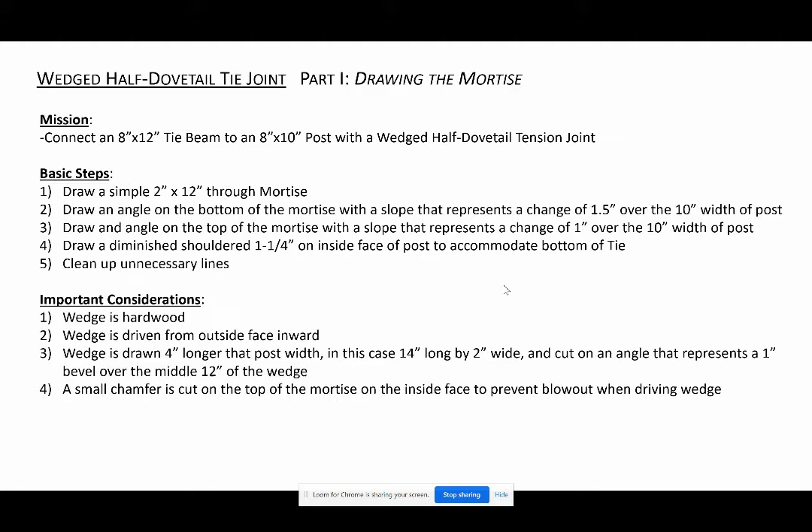And then another consideration is we cut a small chamfer on the top of the mortise on the inside face of the post. And that helps prevent blowout of the wood fibers as you're driving the wedge. So I have some images to show you.

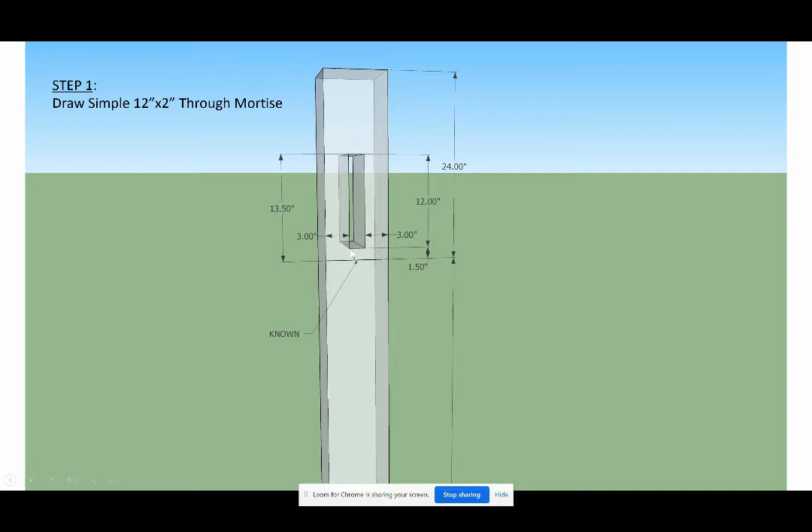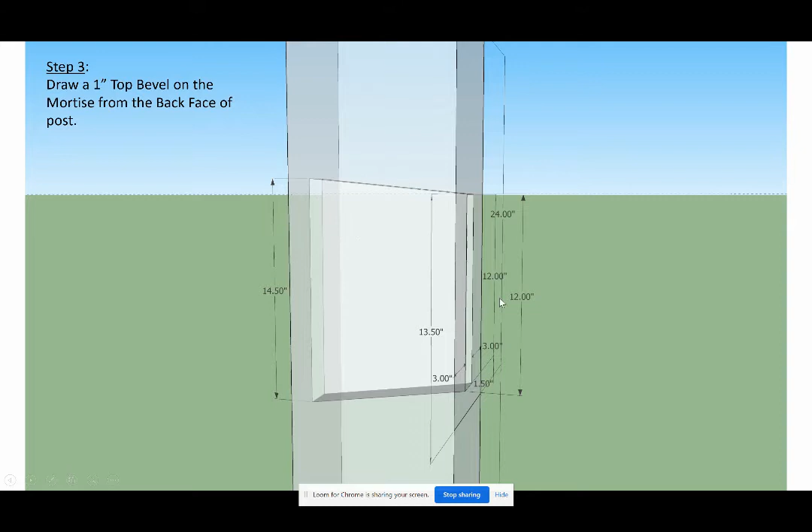So this is the next step that we do, and it's important that you follow this sequence. Once we've drawn the mortise itself, then we're going to create this 1 1/4 inch angled reduction. This is sometimes referred to as a diminished haunch.

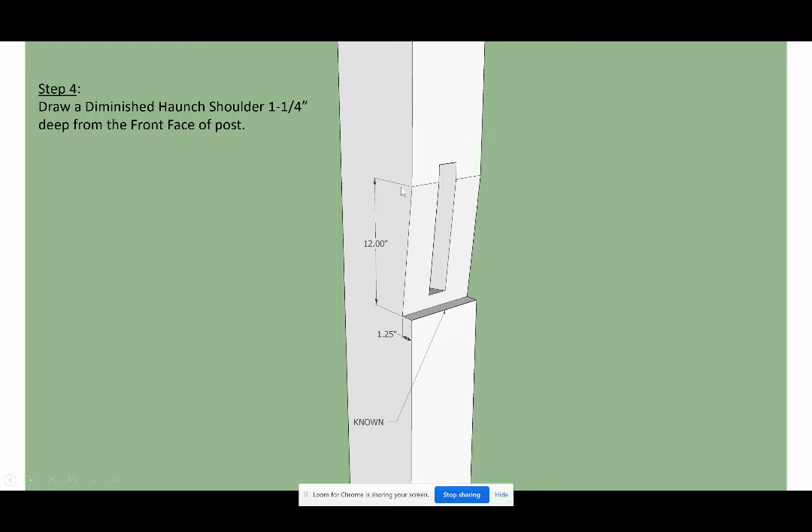You want to have bearing surface on the bottom of this. So that'll be the fourth step that we do. Some folks draw this as a full, straight recess, but we prefer to angle them. So this is the finished product in a frame we recently did.

You'll see that the tie beam is an 8 by 12. The post is an 8 by 10. Bottom of the tie shoulders in 1 1/4 inch. The wedge is driven from the outside face inward, and you'll notice that the tenon is actually cut a little bit short of the outside surface of the post.

So we draw the model full scale, but then when we cut this joint, we actually cut this about 1/4 inch to 3/8 shy of the line, because as this dries, this post will shrink inward more than the tie beam tenon will shrink. So if you cut them at the same level, then eventually as it dries, you're going to have some bulging in your siding. So that's just a little tip as you're cutting that joint.

Here's an unassembled version of this. So you can see the bottom of the dovetail. This bottom part goes in here, and then the wedge would come in from the backside at the top. And this is important that you see these dashed lines. So dashed lines are lines that are not cut. They're just there to help you visualize the joint.

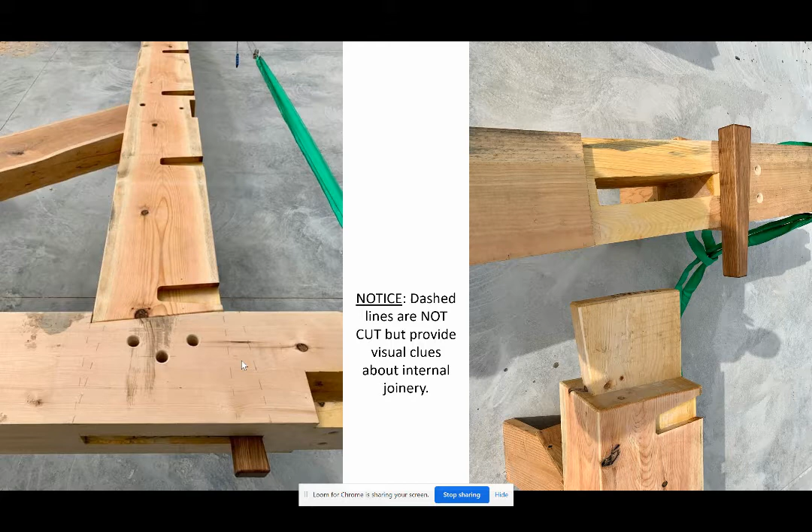And that's really helpful when you're trying to make sure that you're cutting where you're supposed to be cutting. So we would erase those. After the joint was assembled, we'd sand those off and stain the timber.

This represents the little bevel cut that we do on the inside of the post. We just take maybe 1/4 inch or 3/8 inch of material out with a chisel, not a specific angle, but just a little bit of an angle, so that when you drive that wedge, you don't have this face of the timber blowing out.

This is the model that we want to end up with. So we have the post, which is an 8 by 10. We have the tie beam, that is an 8 by 12. And then we have a hardwood wedge coming in from the backside. So before the wedge goes in, this tie beam slides in and drops down into place, and that provides the room that accommodates the wedge.

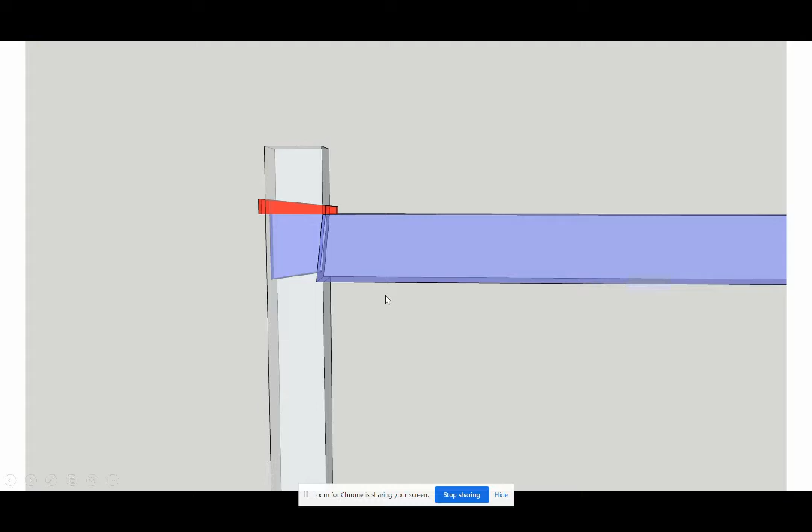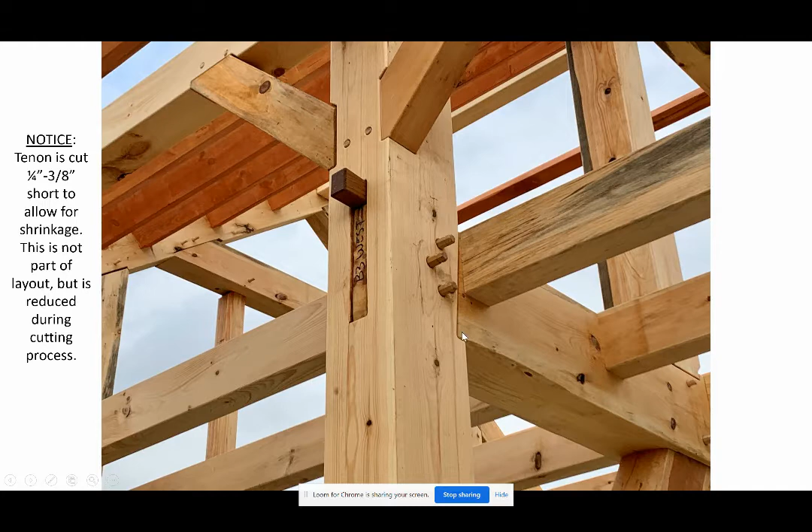One of the things I would like to point out is this is not drawn specifically for square rule layout. We used planed timbers on this, so you can see in this we have the full length of the timber. We didn't house this, we didn't do a 1 inch reduction here, which if you were using unplaned timbers, you'd need to do that. But that's as simple as just before you draw any other joinery, you take into account that inch reduction or 1/2 inch, whatever you choose to do.

So this is the X-ray view of what the post will end up with. You have the mortise that's beveled on the bottom and beveled on the top. From the inside face outward, the bevels go down and up. So it's wider at the back than it is in the front.

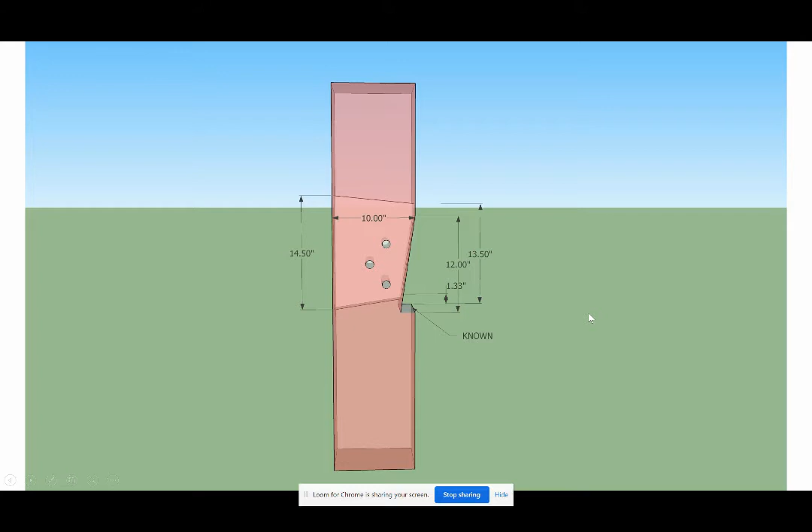You may wonder what this 1.33 inches represents. We lay this out so that this comes out along this plane at 1.5 inches up. But once you remove this material, because this is angled, that reduction ends up being about 1.33 inches from where that actually comes out after you've removed this material from this little shelf here. Don't get yourself too concerned about that. It's not something you actually need to measure. It happens when you cut the joint.

This representation shows where we would have pegged it. This joint in a lot of frames does not even require pegging, because the wedge holds it in place. And if the joint is cut correctly and with precision, the wedge is going to cause the tenon to bear on the bottom of the mortise along the bottom edge of the dovetail. And that's secure enough to hold that together.

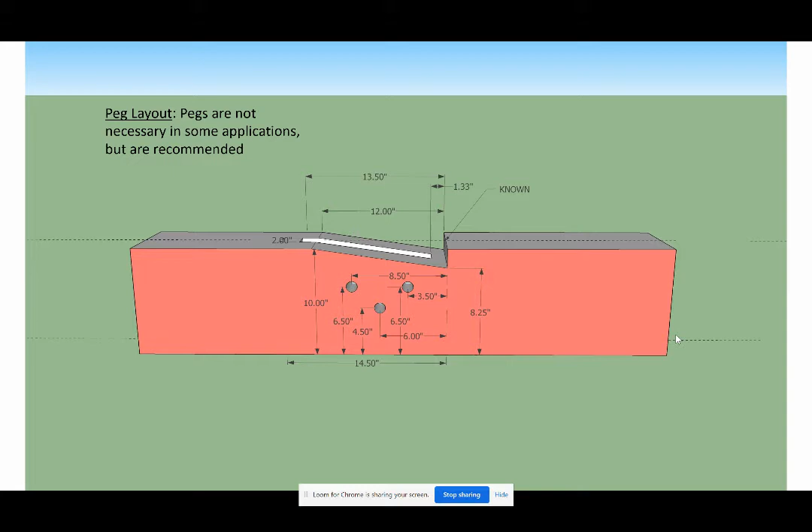Although we often will put pegs in place as well. It's sort of the belt and suspenders approach, right? You're just adding more structural redundancy to it. And this is our ideal peg layout based on the dimensions of this particular model. So let's go to SketchUp and see how we draw this.

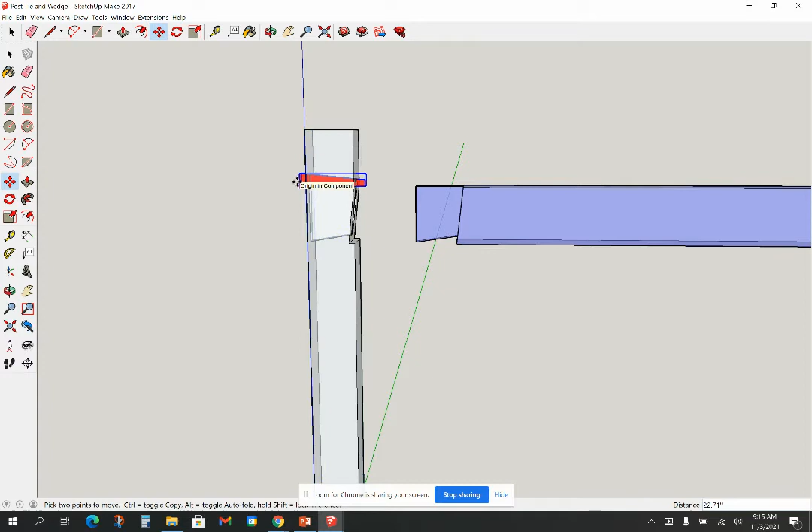So first of all, this is the actual model in SketchUp as a finalized model. So we could pull this out, and we could pull the wedge out if we chose to. So that's the exploded view. So now let's go to a new SketchUp page and see how we're going to draw this. So I'm going to start off by drawing a post that is an 8 by 10 post.

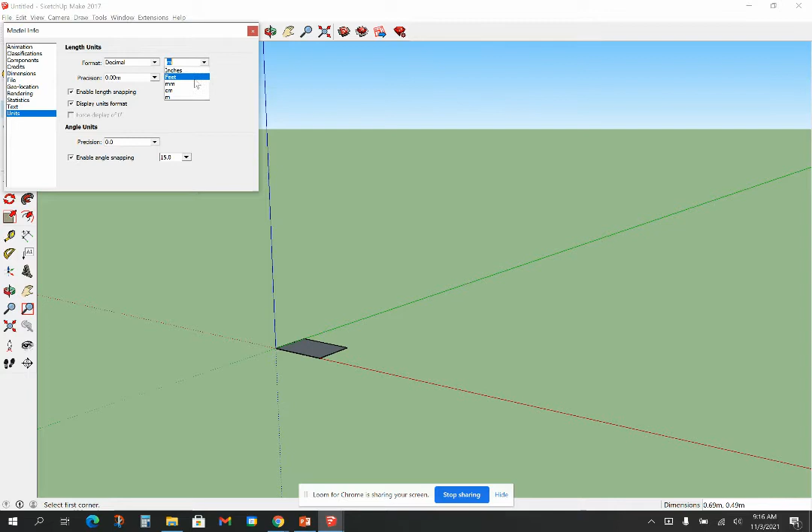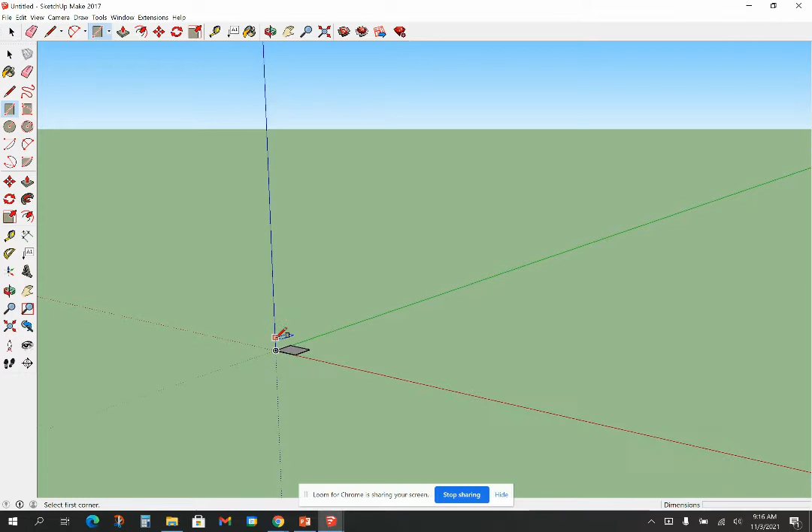So I'm going to come here, pull out a rectangle. Oops, let me back up for just a second. I got to change my dimensions here. It's in meters and I want it in inches. So let's get rid of that. Okay, so we're going to pull this out as a rectangle. So I want it to be 10 inches by 8 inches. And I'm just going to make this post 10 feet tall. So I'm going to take my push-pull tool, make it 10 feet.

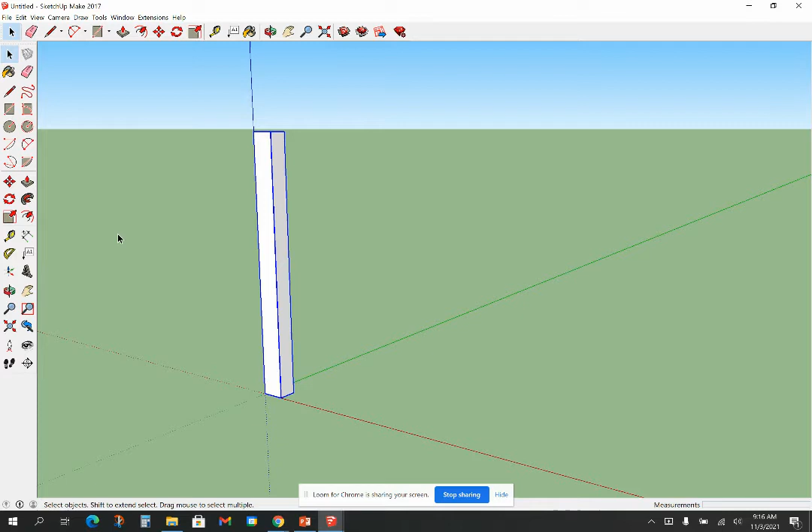And then I'm going to save this as a component. Very important. So I triple click it, then right click, make component. Post. And then in order to modify this, in order to draw that mortise, I need to open that model to make any changes. So I'm going to triple click it.

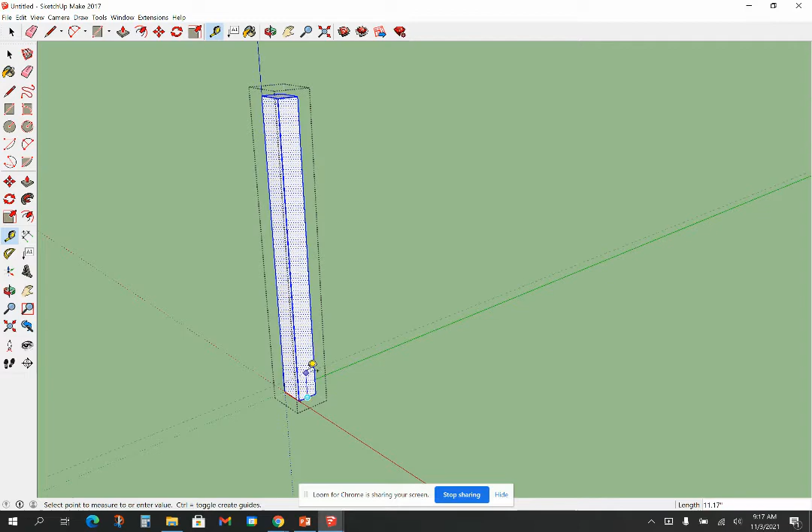My next step is I need to make a guideline that represents the bottom of this joint. And I'm going to choose it to be 8 feet up from the bottom. So I click there and I drag up and I go 8 feet, enter. This is going to become what I refer to as the known. So it's sort of like the basis for where you're pulling all your measurements from. This is going to represent the line where the bottom of the tenon sets on that diminished shoulder.

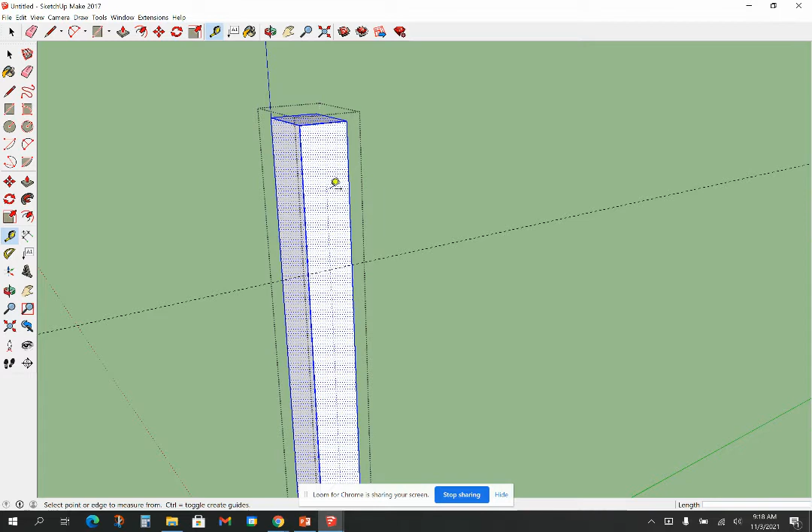And we call that the known because all learning starts at knowns and proceeds to the unknowns. One of our philosophies here at Big Beams Timber Frames. So I've located that. Now I'm going to pull some more guidelines. And you'll notice if I come out here, I can't really grab that guideline because I've opened this component. So I'm going to just kind of come in here. And now I can grab it, click on it, and then start dragging upward.

And I'm going to make another guideline 1.5 inches up. Then I'm going to make another guideline 12 inches up. And a third guideline, I'm going to make 13.5 inches up. Next thing I'm going to do is, because I want this mortise centered on this post, this is an 8-inch post. It's going to be a 2-inch mortise, and I want it centered. So that means there's 6 inches remaining of my timber. So I need to go 3 inches in from either side.

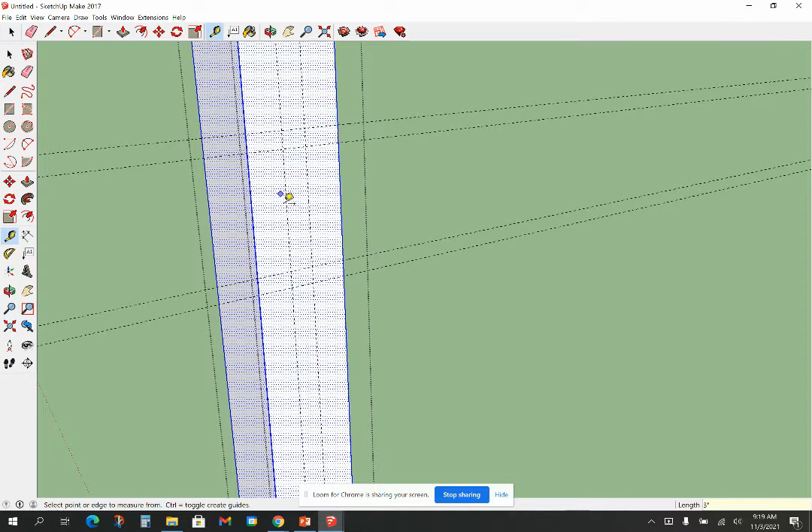So 3 inches there. And then I'm going to come over here, grab that, and go 3 inches. Notice how the green line is there. That tells me I'm pulling it along that face. Another thing you could do is you could kind of just overlap one of these, and that kind of locks it in on the same plane. So I'm going to type 3 inches again. And now what I've done is I've created some guidelines that are going to allow me to make my initial mortise. So the initial mortise is going to be just a straight through mortise that's going to go from this 1.5 inch line up to the 13.5 inch line.

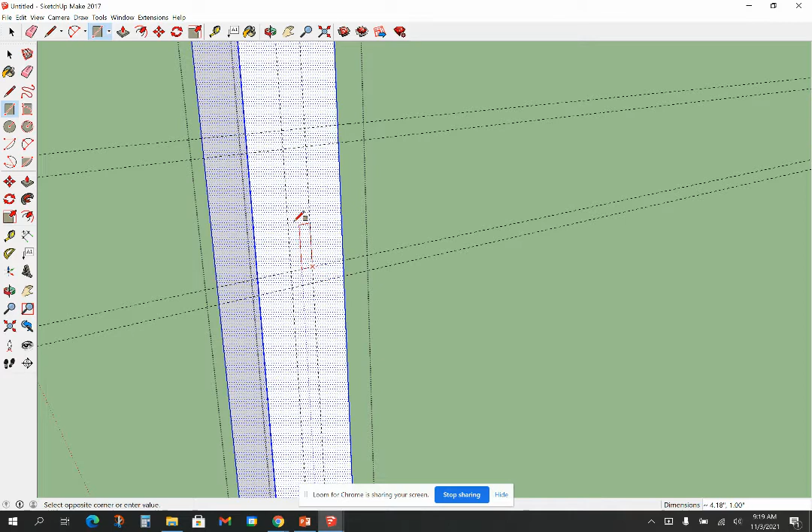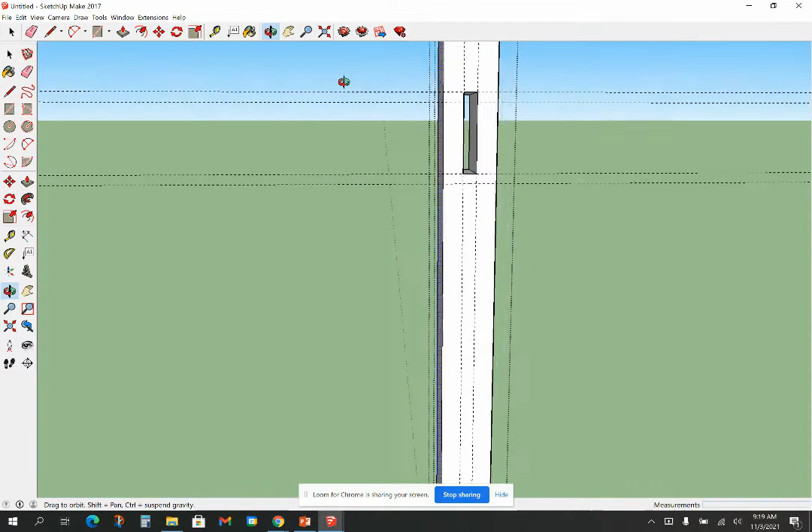So I'm going to come over and grab my rectangle tool and start here, click and drag up to here and let up. And then with my push-pull tool, I'm going to push that inward. And once it starts going in, I'm going to type 10 inches. And then that gives me a through mortise. And you can see it as I rotate it. And it doesn't extend out the backside. It's just a simple through mortise. And that's what we want at this point.

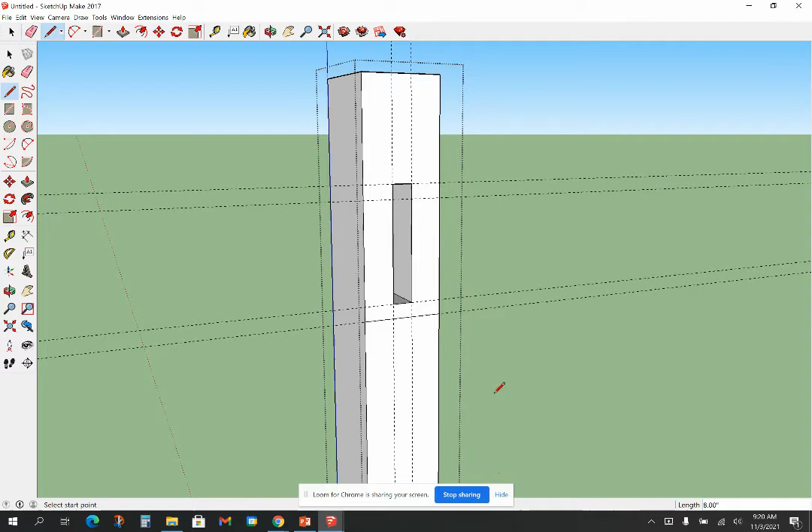So the next thing we're going to do is, I mentioned that we call this our known. I'm actually going to draw a line over top of the guideline. So I have that there. Now I'm going to rotate to the back side of this post because a lot of my remaining work is going to happen there. And I need to make the bevel that goes from this surface downward to the back side. So I need to be able to locate where I'm starting from.

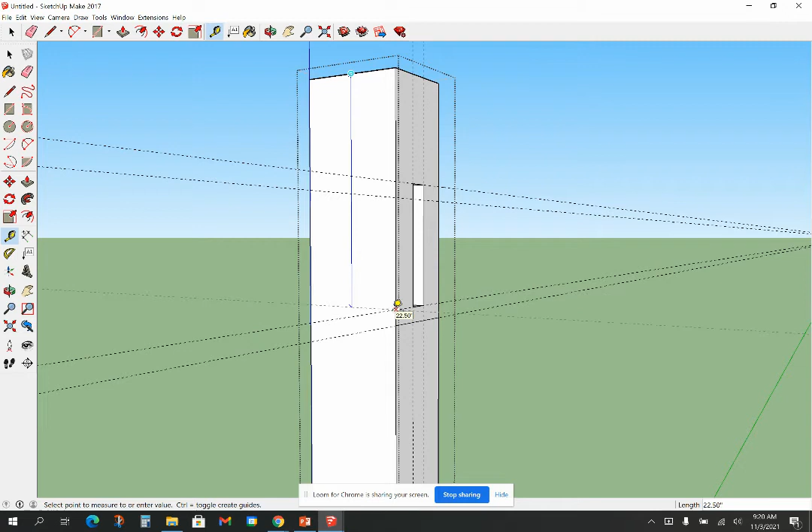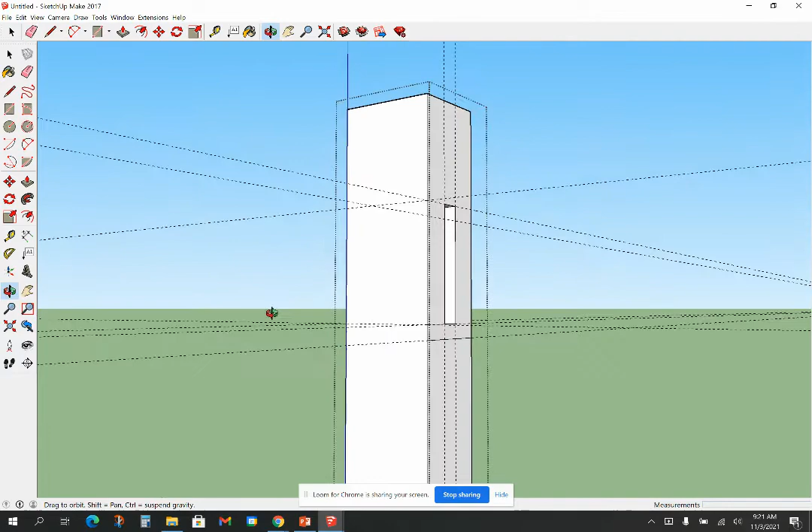So I'm going to go back to my guideline tool. I'll come up here and click this and just see how that snaps to it. Boom, right there. And I have that X. That's what I want. That's going to help me to lay out my initial line for that. And the other thing I'm going to do is I'm going to do that same thing for the top of this one. Now I'm going to rotate that around. And now I can bring this guideline down here to that. And I want to come down 1.5 inches from that.

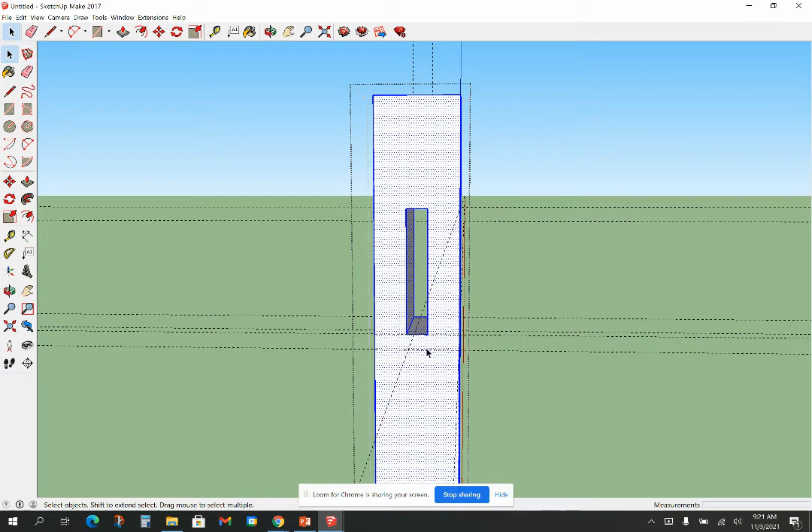Now, remember, this has to be open in order for me to make these changes. So the next thing I'm going to do is I need to drop this down to meet this line and then connect it to this edge. I'm not going to lower the front edge of that mortise. That front edge is going to stay where it is, but I'm going to draw a bevel on the bottom edge. So now that I have my guidelines to show me where that is, I still need guidelines to come in here. Oops.

And then to come in here. So I'm going to use my line tool, and this is really important. Now I'm going to click here, and then over here, and now I have to go into Xray mode. So I'm going to go View, Face Style, Xray. This is really useful when you're changing models around.

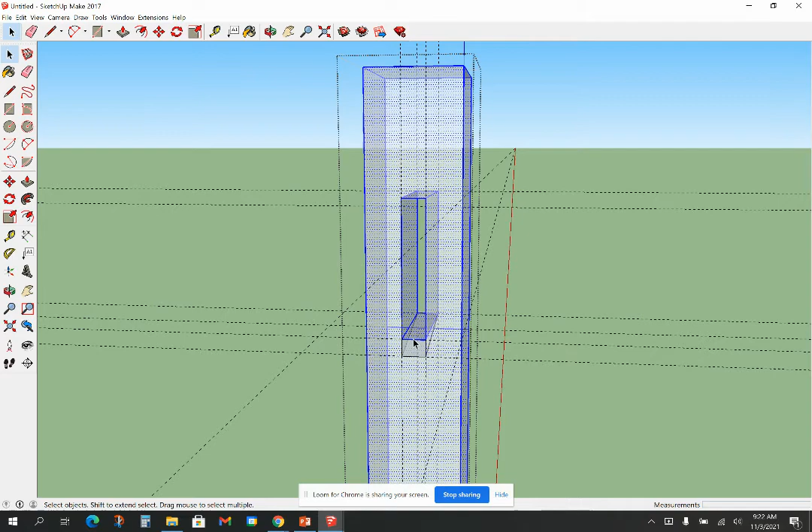And I now need to connect a line where I just drew this lower part from there out to here. And then I also need to do the same thing from here out to here. Once I've done that, now I start cleaning up some lines. So I'm going back to my select tool. I'm going to get rid of this line. And that has made my angle.

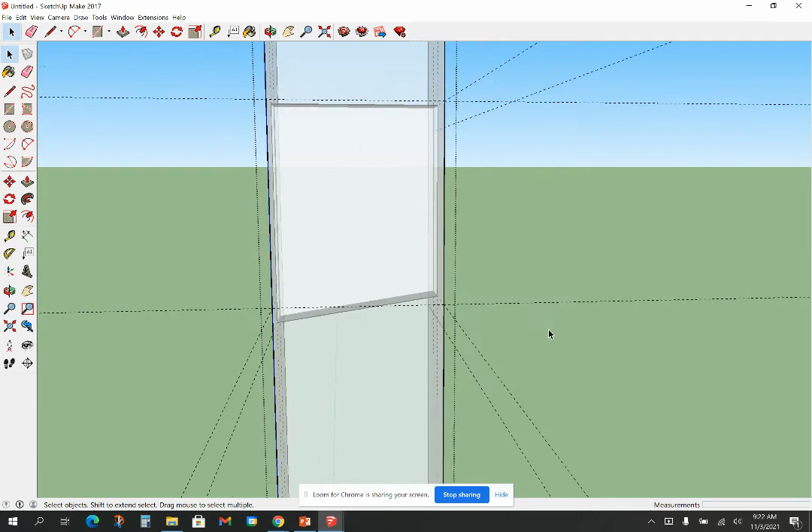But in my model, there's still these other original horizontal lines, and I don't want those to show up in my shop drawing. So I'm going to delete that. It's really important that you're just clicking on what you want to delete. So in this case, we have drawn our 1.5 inch bevel on the bottom. So now the next thing is we need to draw a 1-inch tall bevel on the top.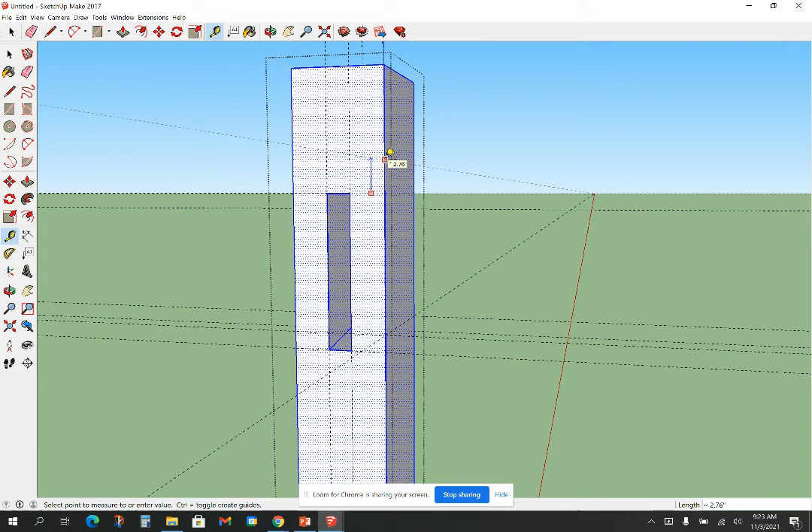So I'm going to come out of Xray mode for just a moment. And I'm going to click outside here. I want to make sure that my component is open. And I'm just going to drag this up. Well, actually, I have a guideline there. This next one is only going to go 1 inch up, so not 1.5 inches. And that was not what I wanted. Let me undo that. I need a guideline at the top of this. Okay, so now I can pull this up 1 inch.

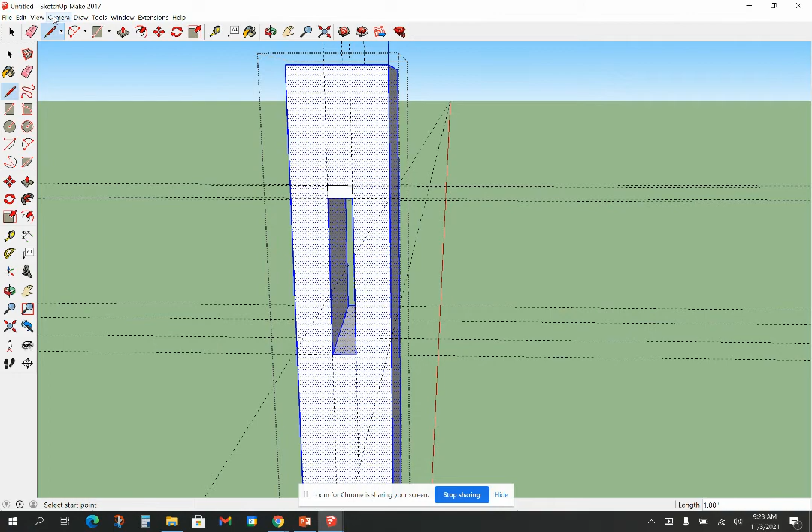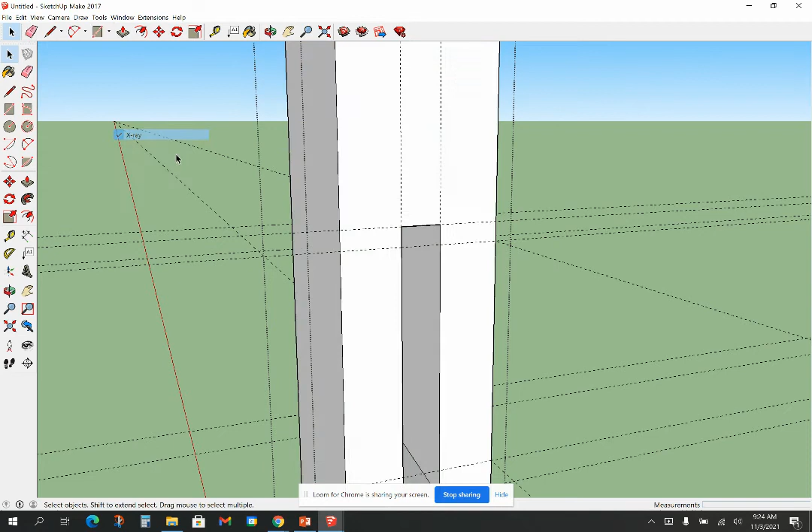Now I'm going to, again, create this little box here. I'm going to go back into Xray mode. And I need to connect these lines. So I need to go from here to there, and from here to there. Then I can come in and delete that line. And then I go in and I delete these lines just to clean this model up. I'm going to come out of Xray mode. I'm going to delete my guides.

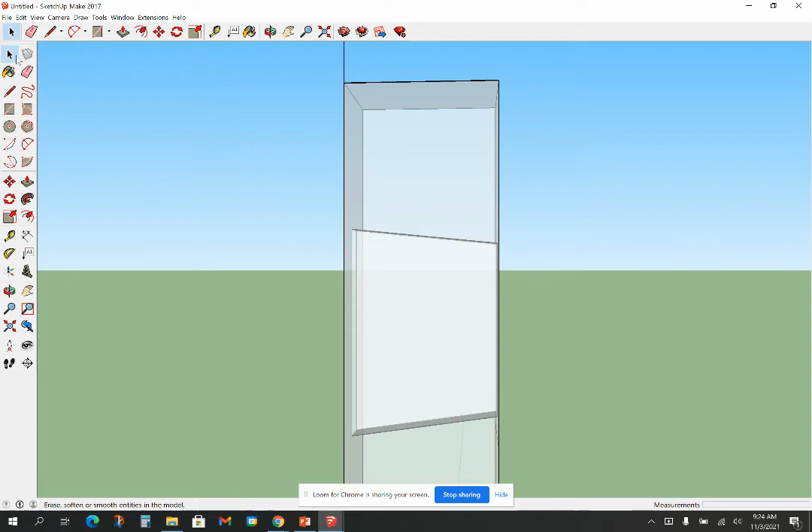And you see we have our mortise drawn. We have our through mortise, and, let me go to Xray View again, and you can see what we have here. So the next thing is we need to draw this diminished shoulder. So I'm going to go out of Xray, and I'm going to reopen that by triple clicking it.

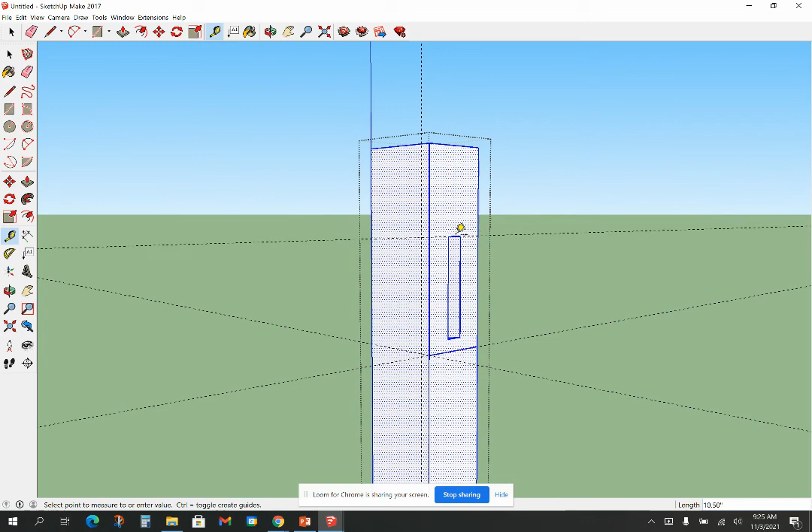I'm going to come down here and get my guideline, and I'm going to come over here and get my guideline. And now I want to come in 1.25 inches from that face. As long as I'm dragging on that line, I'm good. Or if I just go right to the far side and it says 10, that's fine. I'm going to type in 1.25 inches. Need a guideline at the top of this. So I have to come over here and put a guideline. And then I come down and get a, oops.

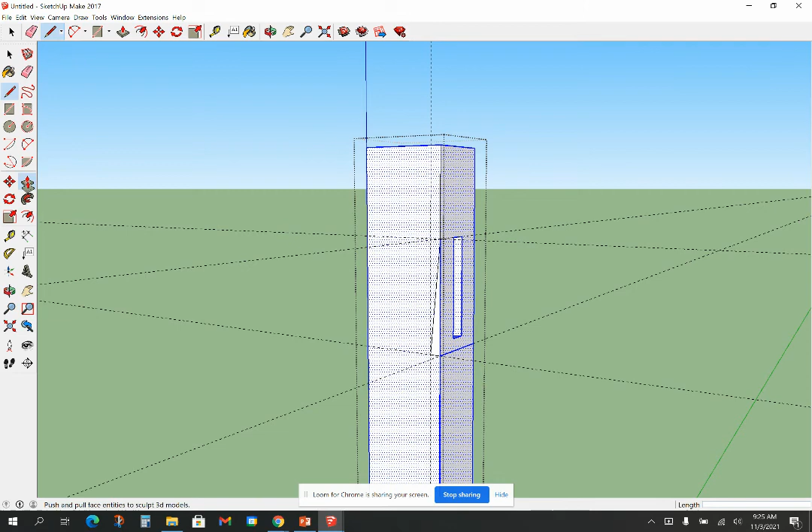Get a guideline there. So I now want to draw lines from here into there, and it's important that you see that X. And then from here, I'm going to come up to this, and that's angled. Now that I've done that, I can push-pull that. Now, I can't go all the way through because that mortise is there, but I've done one side. I'm going to come over and do the other side.

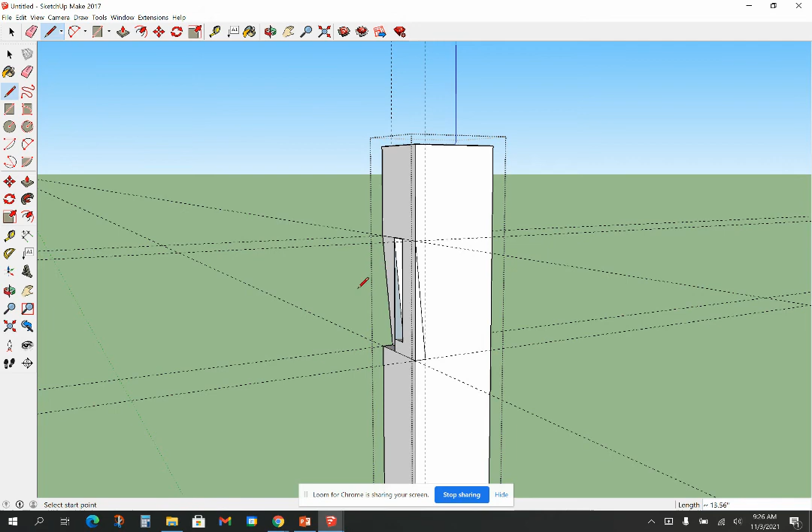So again, I'm going to pull a guideline down to there, pull a guideline down to there, pull a guideline in 1.25 inches. And I'm going to draw a line that goes from here, which represents my shelf, and then this angled line up to here. And then I'm going to pull that in. Now I have this remaining and I can push that out. But now I have to do some cleaning up.

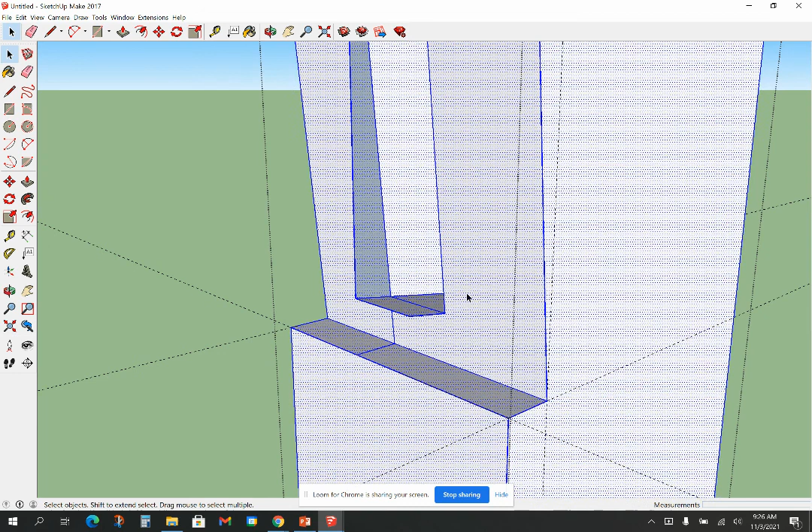And it's really just a matter of selecting this, get rid of that line. I'm going to get rid of this line. Whoops, I don't want to get rid of that face. Just want to click that line and that line, this line, that line. Whoops, don't want to get rid of that face. Let me undo that. Get rid of that line, and let's get rid of this line here. And then finally, get rid of that line. I'm going to delete guides.

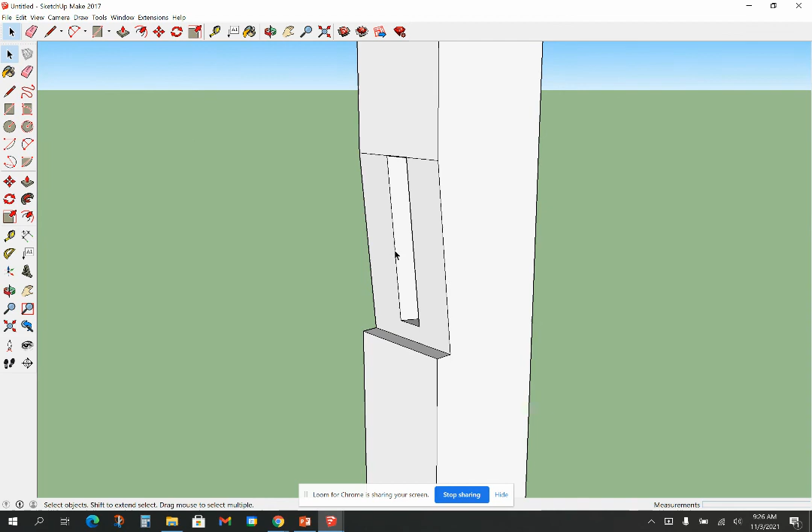And you can see I've drawn, let's go into Xray. So we have drawn the mortise with bevels on the bottom and the top. The bottom bevel drops 1.5 inches. The top bevel goes up 1 inch. And we have created the 1.25 inch shoulder for that.

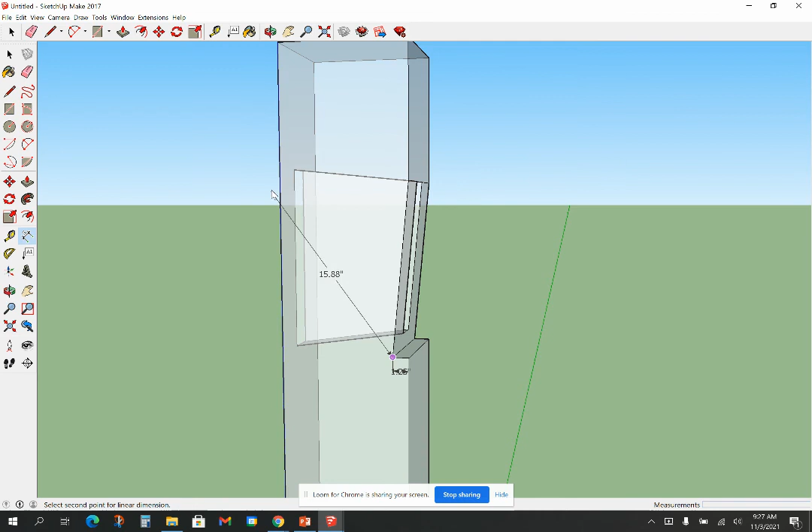So we could come in here and we could put dimensions on here. That's 1.25 inches. We could even come back here where you would actually want to be like 8 and 7/8 or 8 3/4 from the backside for square rule layout. So there you have it. This is the first step in drawing the wedged half dovetail joint in SketchUp. In the next video, I will show you how to draw the tenon on the tie beam.